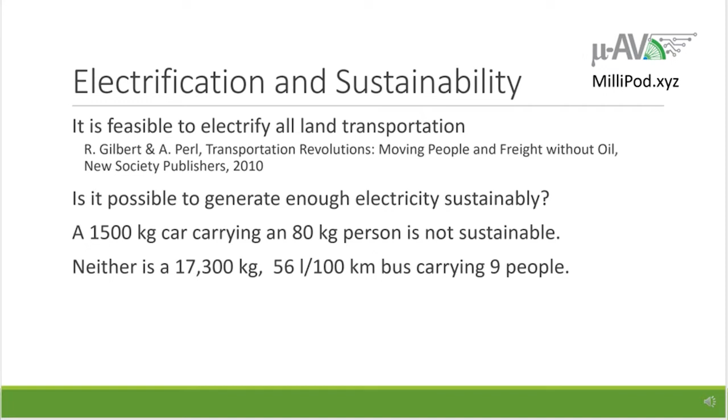In the United States, people drive about 5 trillion kilometers every year. However, about 65% of that is urban, and the average urban trip is only 19 kilometers. Now, the speeds that cars typically travel in the cities are not that great, typically between 19 and 34 kilometers an hour. Bus or light rail doesn't do a whole lot better than that.

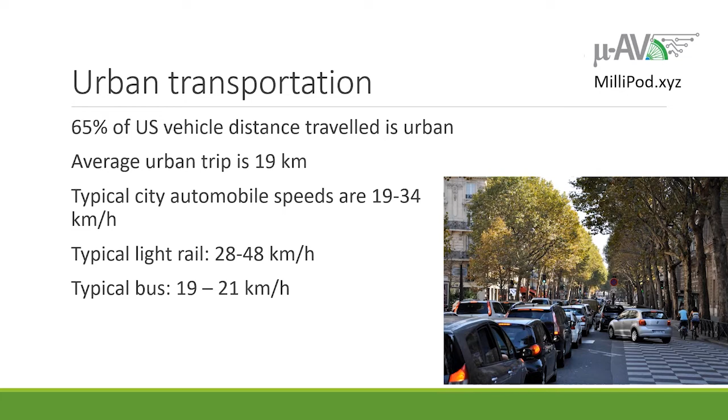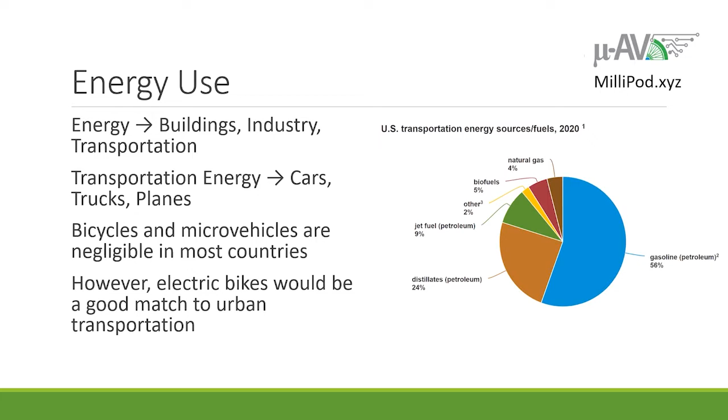The three principal uses for energy are to do heating and air conditioning for buildings, to supply power for industry, and to provide for transportation. Now, there are decent sustainable solutions for the first two, but transportation is a little more problematic since fuels have to be portable. The energy for transportation generally goes to gasoline for cars, diesel for trucks, and jet fuel for planes. Electric micro vehicles are a good solution to the energy problem, but they don't seem to be widely used throughout the world.

Let's look at the physics of what it takes to move a land vehicle. The energy to move a vehicle consists of two parts. One part to overcome rolling resistance, and the second part to overcome aerodynamic drag. The energy to overcome rolling resistance is directly proportional to the velocity and the mass, but the energy to overcome drag does not depend on the mass of the vehicle, but is proportional to velocity cubed. So at lower speeds, the rolling resistance is more important, and at higher speeds, the aerodynamic drag becomes more important.

For heavy vehicles such as automobiles, the rolling resistance dominates at speeds less than 55 kilometers an hour, and the aerodynamic drag takes over once we get above 55 kilometers an hour. When the vehicle is light, then you don't have that much rolling resistance to start out with, and the crossover point is at about 20 kilometers per hour.

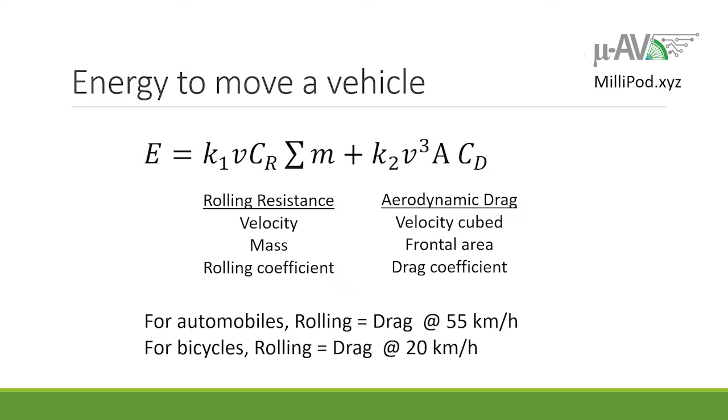Now, let's drill in on a more detailed version of the energy to overcome rolling resistance. I had left out a couple of these terms in the previous slide, assuming that the slope was 0 and that the acceleration is 0. When you do have to go up and down hills, that's going to take more energy. When you do have to accelerate, you have stop and go, that's going to take energy. There is an energy penalty for stop and go, and having heavy wheels is also going to impose an energy penalty.

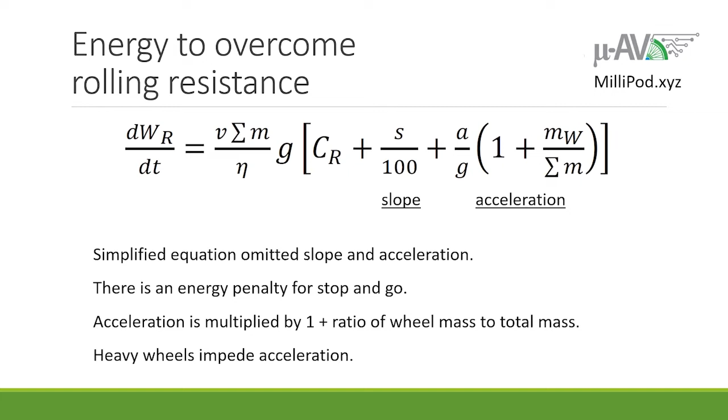Here is the more detailed equation for the energy to overcome drag. There are terms in here that we can control, such as the drag coefficient, how much we streamline, or the frontal area, or we can control how fast we're going. There are things that we can't really control, such as the mechanical efficiency of the transmission, because that's already about as good as it's going to get. And we can't control the air density and the wind speed unless we're going to build a hyperloop, and that's not going to work in the city.

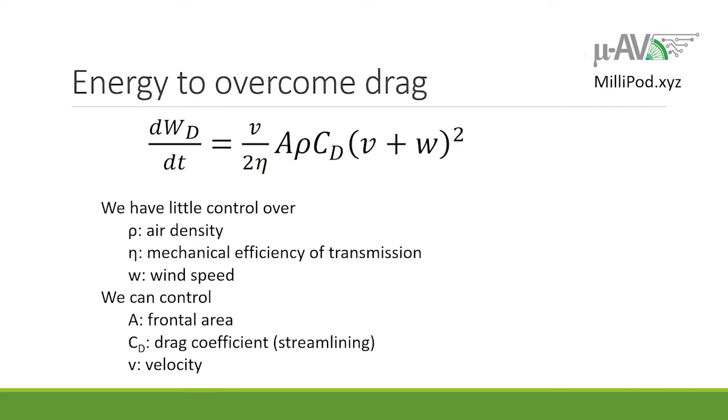Next, let's look at the energy that it takes to move a heavy vehicle versus a light vehicle. If you have a car with a single person occupying it, you'll need 31 kilowatts to move one person at 50 kilometers an hour. With a bicycle, it takes only 1 kilowatt to move that person at the same speed. Of course, getting a bike to go at 50 kilometers an hour will require either that you are a professional athlete or that you have an electric helper motor. And for this talk, we're going to go with the electric helper motor. If you streamline a bike, the energy required gets even better, dropping to 0.2 kilowatts.

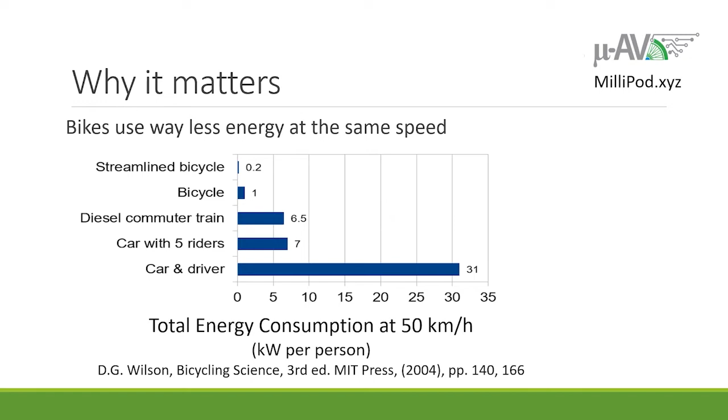In fact, with highly streamlined bicycles, you're able to get up to 130 kilometers per hour just using human power. Buses are touted as being very efficient, but that efficiency is not based on fuel efficiency, which is pretty lousy. Even when you divide your fuel consumption by the number of people who are riding the bus, it's still not particularly good. The main efficiency of buses is the lack of congestion.

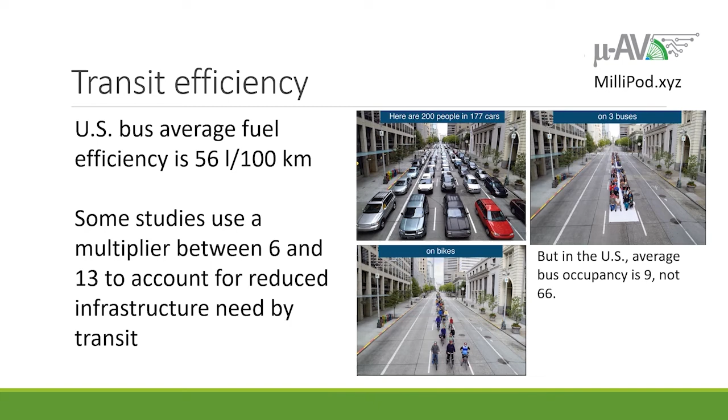The efficiency of buses is mainly based on the multiplier, which is somewhat fictitious. It's maybe applicable when you really have a good transit system using buses, not so much otherwise. If we ever get to self-driving cars, they have a number of advantages. One of them is less congestion. It's expected that self-driving cars can reduce congestion in the city by a factor of 2 or more, since they're basically choreographing themselves and making more efficient use of the space they have on the roadway.

But the main advantage of self-driving cars is safety. We're never going to have self-driving cars unless they are significantly safer than human drivers. If we can drop the traffic accident rate by a factor of 10, the lives saved will be not just the people driving the cars, but people outside the cars, such as motorcyclists, pedestrians, and bicyclists.

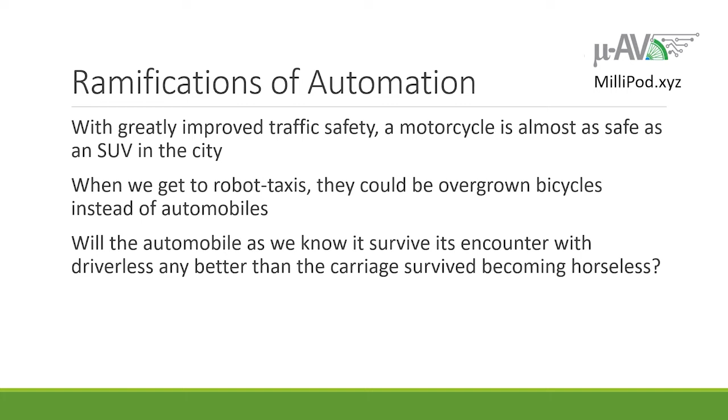If fully automated or partially automated vehicles can deliver on their promise of greatly reducing traffic accidents, it makes 2- and 3-wheel vehicles much safer to get around the city. They become a real transportation option. The preferred city vehicle of the future might look more like an overgrown bike than a traditional automobile. There's no reason to suppose that the automobile as we know it is going to survive its encounter with becoming driverless any more than the carriage survived becoming horseless.

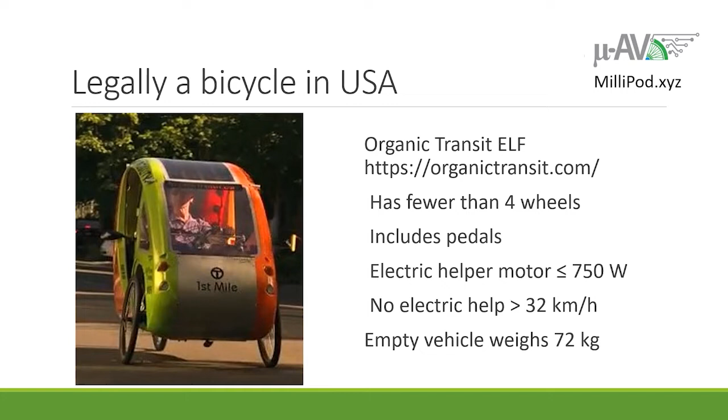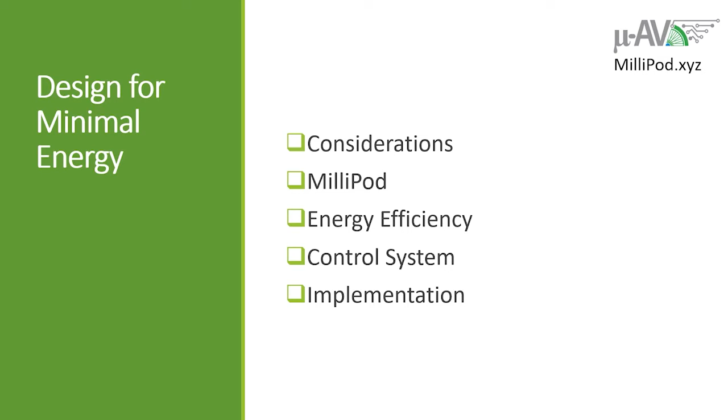This is what I mean by an overgrown bike. It looks like a small car. 72 kilograms is awfully light for a car, even though it's heavy for a bike. With automation, it is possible to build an entire urban transportation system around vehicles this size. We have completed our review of what it takes to design vehicles with minimal energy to use in the city. The next section is going to look at how we put that into practice and design an urban transportation system that can really minimize energy.

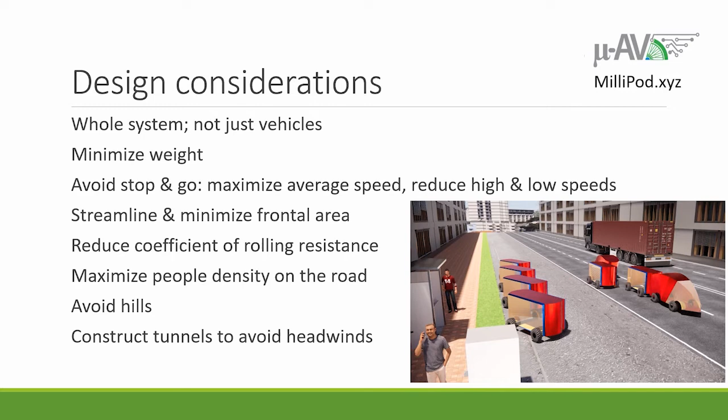We need to design a whole system, not just a vehicle. We need to eliminate stop and go so that the vehicle can go through at a constant 50 kilometers an hour. An efficient vehicle doesn't do any good if it's stuck in traffic. We need to streamline the vehicle, minimize frontal area, cut down the weight, and do what we can to minimize the rolling resistance. Systems should maximize people density on the roads and favor people over vehicles.

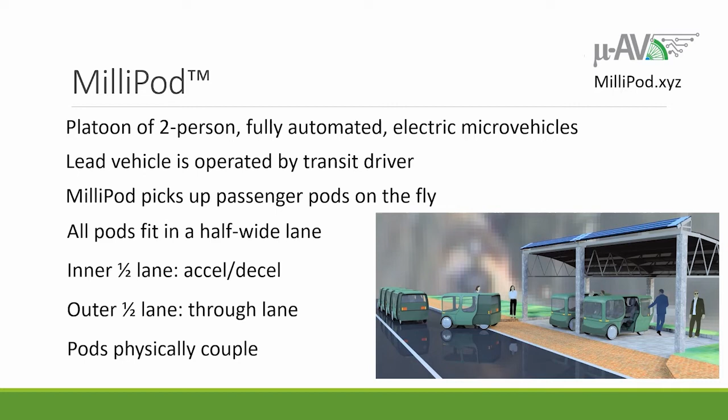The solution is the MilliPod, which is a platoon of 2-person, fully automated electric micro vehicles. They follow a lead vehicle that's driven by a bus driver. The passenger pods are fully automated within a strictly limited operational design domain. The MilliPod picks up passengers on the fly and never needs to stop at bus stops. The pods fit into a half lane, so we divide a standard lane into 2 half lanes.

Riders would come to a bus stop, pay their fare, and select a destination. The passenger pod doors would then unlock, the rider would be seated, and wait for the platoon to come along. When it comes along, the pod pulls out into the acceleration lane, accelerates, and then couples onto the rear of the platoon. It maintains its position until the destination comes, at which point it decouples from the other pods, moves into the deceleration lane, and comes to a stop.

I'm Folsom, founder of MicroAV. And I'm Matthew Muscola, electrical engineer. MicroAV is about to disrupt the transportation industry by introducing the MilliPod. The MilliPod moves people, not just vehicles. It is a train of 2-person, fully automated electric micro vehicles that follows the bus driver's pod. These vehicles will never need to stop. They'll be able to pick up passenger pods on the fly.

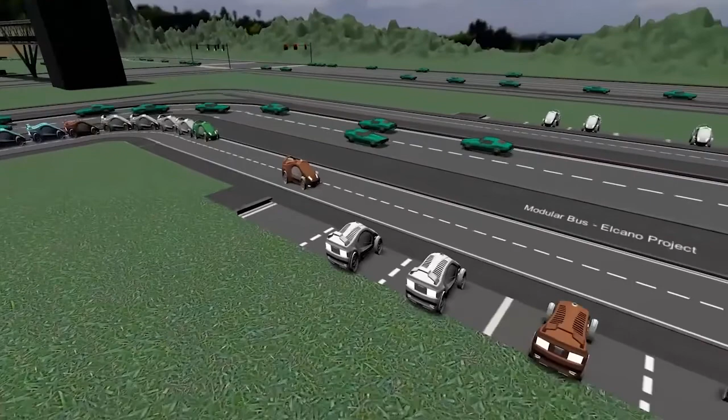Here's the concept. In this 3D rendition of the MilliPod system, we see a platoon of vehicles traveling in its designated outer half lane. Red pods represent those commuters joining or detaching from the system, using the inner half lane to maneuver without affecting the other vehicles in the platoon.

MicroAV is actively working on the MilliPod system. We are looking for strategic partners and are interested in feedback from the community and transportation planners.

More energy efficient is the MilliPod. We have a weight savings that gives us a factor of 2 to 5 times over the bus. The wheels are more efficient by a factor of 2.5 times. When you multiply those two together, we get an energy reduction of a factor between 5 and 12.

It's more than that. The stop and go is a big energy penalty for the bus. The whole bus needs to stop at every bus stop. For the MilliPod, only a few of the passenger pods need to stop, and the avoidance of stop and go at bus stops gives us an additional energy factor of about 18.

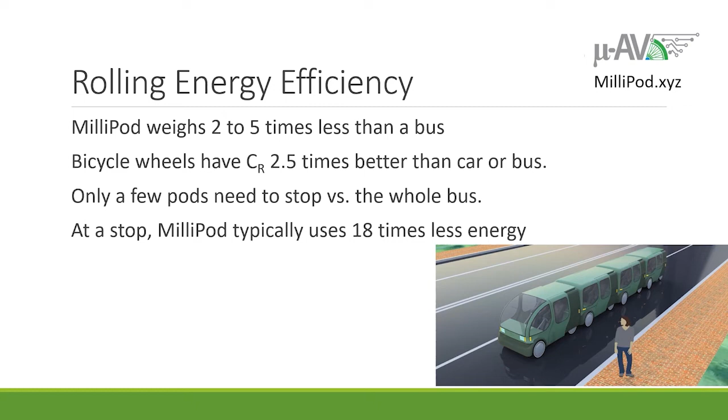Let's turn our attention to the drag side of the energy equation. The drag coefficient for a bus is 0.6 to 0.8. A really streamlined MilliPod can get that down to 0.12. Let's settle for more of the automotive range of 0.25 as a drag coefficient. That's 3 times better than the bus.

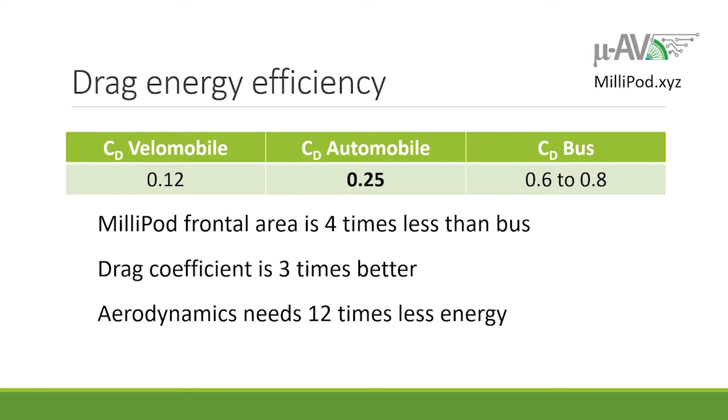Since the MilliPod has less frontal area, the bus has 4 times as much frontal area, the total aerodynamic drag on the MilliPod is going to be 12 times less than that on the bus. No stops for passengers. A MilliPod can cover a bus route 50% faster. This means that drivers will be able to cover more routes in the same amount of time, thus providing more frequent service.

COVID-19 has really decimated transit. With the MilliPod, a person has their own private space and doesn't have to share space with a stranger or breathe someone else's air. They are renting the whole pod and can choose to share it or not.

Pulling off bumper-to-bumper platooning is going to take some effort. It takes a very good control system. These are aided by a mechanical system that lets the dampers in the bumpers absorb any minor mismatches in force. Force on the physical couplers between vehicles is kept to close to 0.

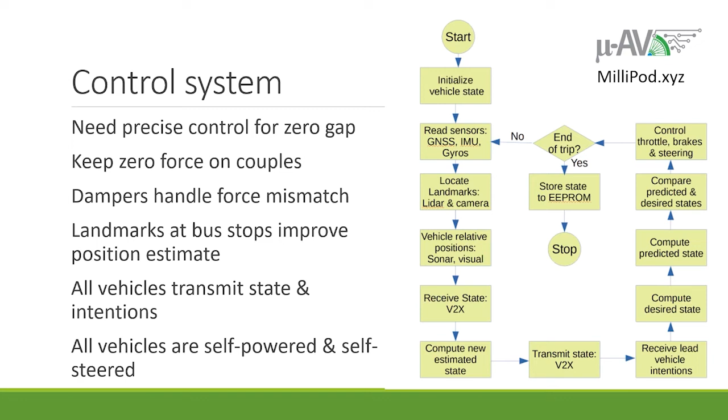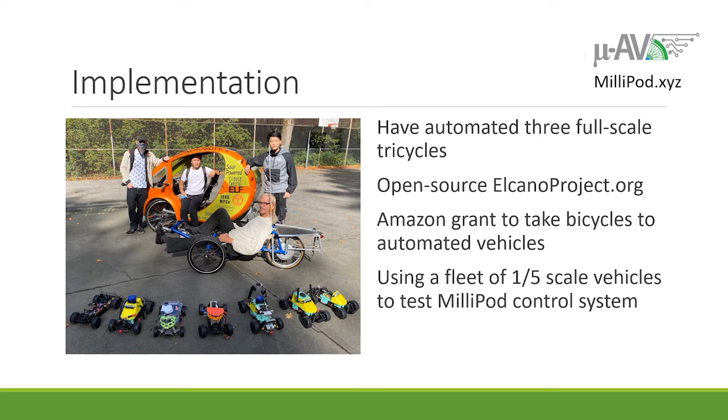We depend on good navigation, knowing exactly where our location is, and we're able to share that information between the vehicles in real time so that we can have precise relative maneuvers between the vehicles. We are using a fleet of scaled model vehicles to test the MilliPod control system, and we have automated 3 full-scale tricycles.

Finally, let's look at where automated micro vehicles can go beyond the MilliPod. The base design for the MilliPod just covers bus routes. It does nothing for the first or the last kilometer. It will be quite easy to change this and equip the passenger pods with user-operable controls so that the pods can be driven manually and then operated the way you would for a bike share or a car share.

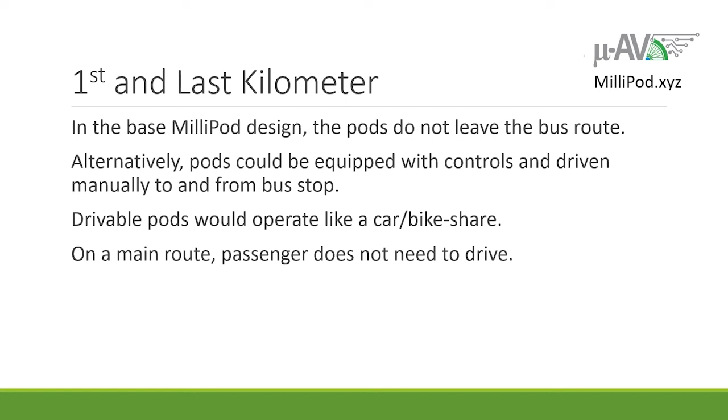A person could use the pods the same way they would as a bike share, except that when they get to a bus route, they can wait at a stop and then join a MilliPod as it goes by and not have to drive in the main part of their trip.

MilliPod is designed to run entirely off renewable energy. The pods use a 20-kilogram battery, which is good for a 30-kilometer range, which will handle most urban trips. When the pod's battery gets low, it will take itself to a bus stop that enables battery swap, swap out the battery, and be back on the road again in less time than it takes to fill a gas tank.

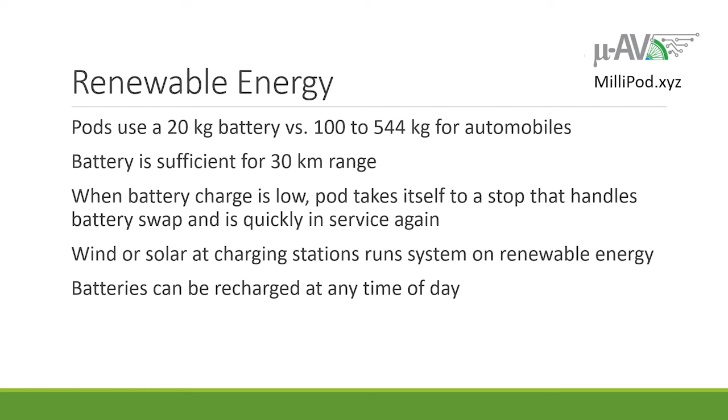A bank of batteries that don't need to get recharged at any particular time, that can be recharged when there is wind or solar available, is very synergistic with enabling these forms of renewable energy.

At some point in the future, entirely self-driving vehicles will become practical. When this happens, the lead pod for the MilliPod is no longer needed. We don't need the driver, so the whole system can go completely self-driving. Passenger pods can change into self-driving taxis and take their occupants anywhere without needing the bus lane. They can still couple together to reduce traffic, and the narrow width of the MilliPod is further going to reduce traffic.

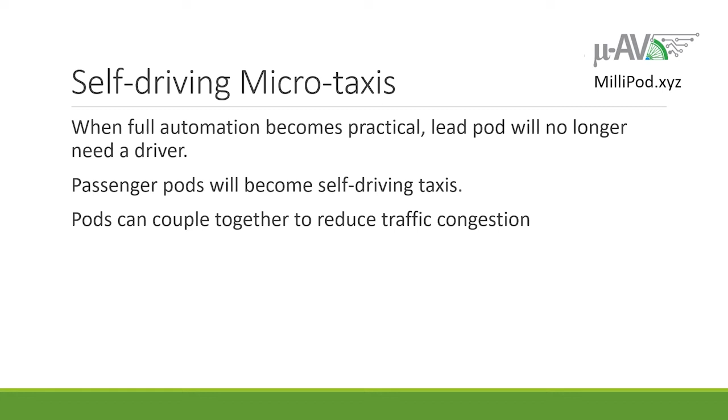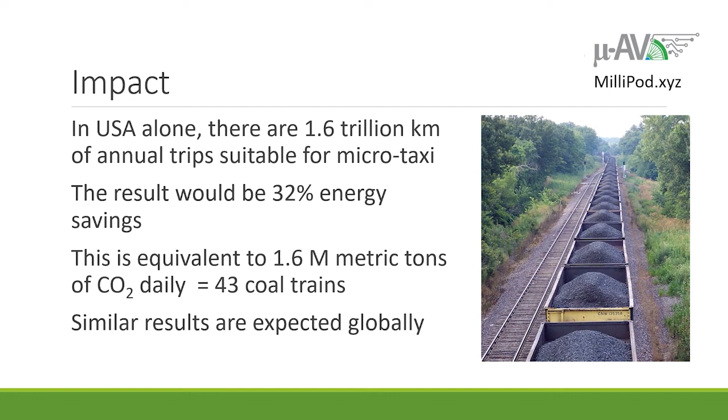The impact of this is that in the United States, there's about 1.6 trillion kilometers of trips every year that are suitable for micro-taxis. If this switch to micro vehicles were made, that would account for a 32% reduction in energy, which comes out to 43 coal trains every day in the United States alone. We're expecting similar results around the world.